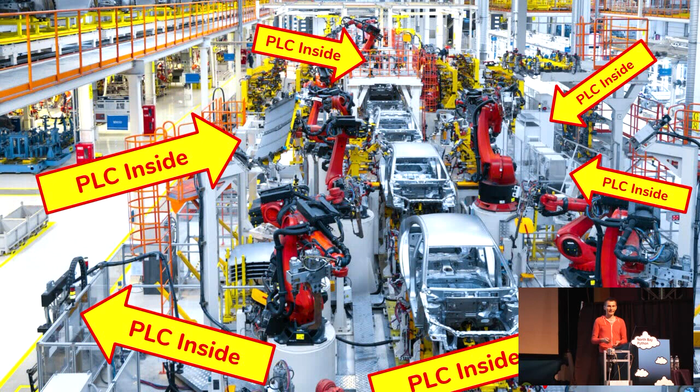Because if you walk around a factory like this one, you keep an eye out for these metal boxes, the electronics panels, and they have a couple of readouts and buttons and dials and stuff on the outside, and if you open them up, it's quite likely that you'll find a PLC on the inside, controlling a robot, or like in this case, a standalone window tinting machine.

Of course, most of us don't have access to car factories, so you can also find them everywhere else. Wind turbines, construction cranes, amusement parks, car washes, escalators. In every city, there's PLCs controlling the HVAC and the elevator of most buildings. At this point, I probably have you believe that there's a PLC in every box that you find in the street. That's actually not the case.

This is an example of a control box for a traffic intersection with a signal. Those are really quite simple in terms of the logic that's going on, and there's thousands of them all over the country and the world. You can actually buy fixed electronics off the shelf, and you don't need any programmable logic. There's nothing custom in it. Except, of course, when your intersection is part of a traffic management system that's capturing the whole city, or you have a tram crossing, then your logic becomes custom again. You need programmable, so you might be using a programmable logic controller.

You might have heard that thing where if you're in a big city or in a small town like Petaluma, you're never more than 10 feet away from a rat. I'm gonna add to that urban myth, and I'm gonna say you're also never more than 50 feet away from a PLC.

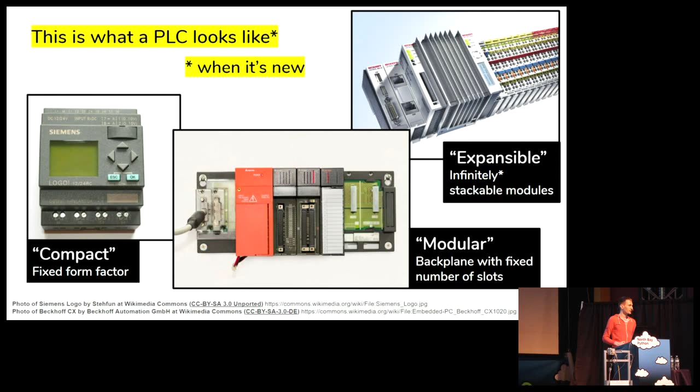I do realize I haven't told you what a PLC actually does. The wires are the first hint. So we talked about how PLCs are programmable, so they definitely live in the world of software with bits and bytes. But the wires connect them to field devices, and those aren't like Ethernet wires or anything. These are just electrical wires. So the other side of the world that the PLCs have the other foot in is the physical world of atoms and electrons. And the PLC is one of the devices that lives right at that interface.

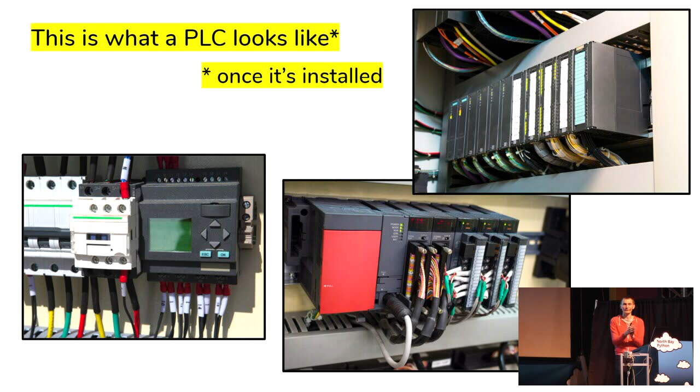I mentioned field devices. What's that? It's a fancy word for sensors and actuators. And you all know a sensor is the kind of device that takes a physically observable phenomenon from the real world, turns it into an electrical signal, and maybe we can turn it into a variable later on. And an actuator is sort of the reverse. We might start with a variable, we turn it into an electrical signal, and the actuator has an effect on the physical world. I made this slide, took me forever.

The only take home here is there are lots of different electrical signals out there. In fact, that's where this whole modular business I talked about earlier comes from. You can't just wire any wire up to any port on the PLC. You need to buy the right hardware that supports the type of signal you're working with. We're not going to do an intro to signals here. That was actually a semester-long class in my undergrad.

What I want you to remember is that there are digital signals that are either on or off, and they might turn into a Boolean variable later on, and analog signals that need to be sampled more precisely, and they might become a number in our code later on. And then we have inputs from the sensors and outputs to the actuators, which leads to cool abbreviations like DI for digital input, AI for analog input, DQ for digital output. Yes, there's a Q there, and that's just a weird standard in automation. I assume they use a letter Q because the letter O looks too much like the number 0.

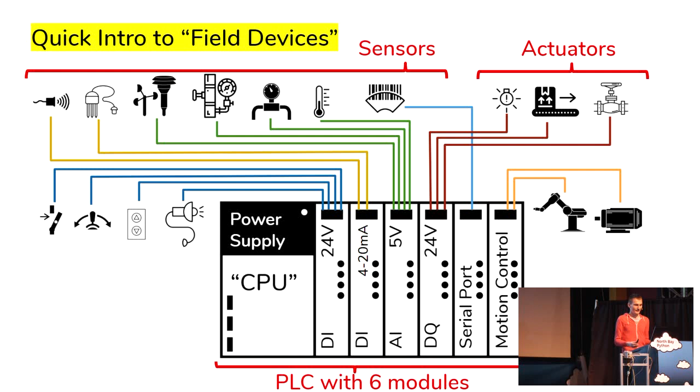So we've purchased it, we wired it up. What does it do? Like every computing device, PLCs go through the IPO cycle. We actually heard about that yesterday. Step 1, input, in the case of a PLC, is where it samples the electrical signals that come out from the field devices. It turns it into a variable. It stores it in a place in memory called process image in. Step 2, program or process. We execute some application program.

Now, most programs that we write take input variables and compute output variables from them. The outputs get stored to somewhere else in memory. And then step 3, output for the PLC. That means take those output variables and write them back to the electrical wires as electrical signals to the field, to the actuators to do something. This gets executed over and over and over again at a sort of fixed cycle rate. And the interesting part really is step 2, because that's where we can have an effect on what the PLC is doing. And also that's where the name comes from, because that's where this programmable logic lives.

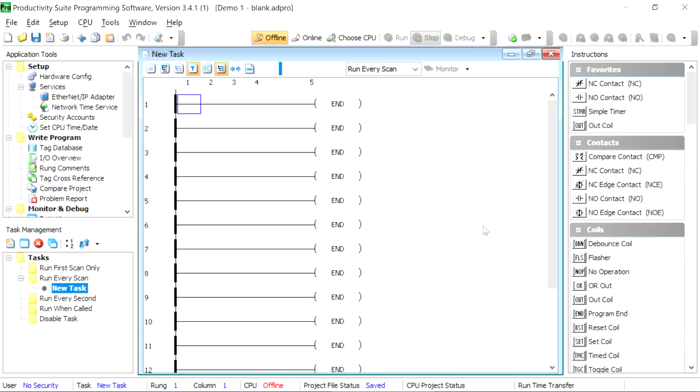All right. Just to recap, we've established PLCs are the device at the interface of the world of software and the world of hardware, the physical world. They're wired up to field devices with electrical signals, and we can program them. So why don't I fire up my favorite text editor and start programming the PLC? Just kidding. PLCs are not programmed with text, and you also don't use your favorite software.

You use the one software that the vendor of the PLC gave you to program their brand of PLC. So I actually selected the PLC I brought today specifically because the programming software is visually uncluttered enough that I dare to show it on a presentation screen. You should check out what the other programs are. I'm also going to use this zooming in feature every now and then.

So this is really the programming, like the editor window here. You see my cursor dancing around? On the left side, there's this vertical line. Imagine that's electrified. There's a voltage applied to it. And the electrons are trying to travel across these horizontal lines here. Now, we have the power to change their behavior by putting circuit elements like this normally open contact, which I tie to a variable called di1. Now you know why I was talking about signal types earlier.

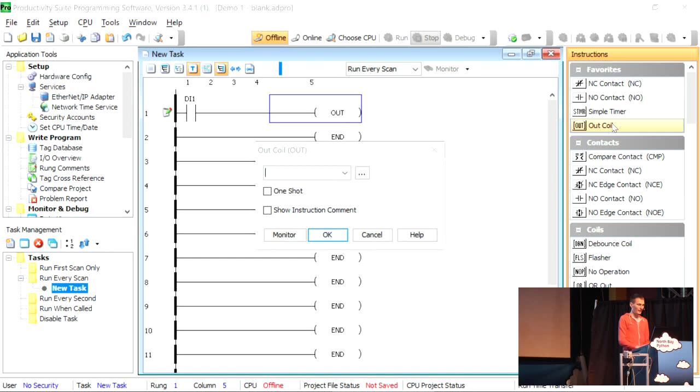Now, if di1 becomes true, current can travel here where my cursor is. If di1 is false, it cannot get there. So we use that to put an output coil that we wire up to a variable called dq1. And basically, we've just built an if statement in this language. If di1 is true, dq1 will also be true.

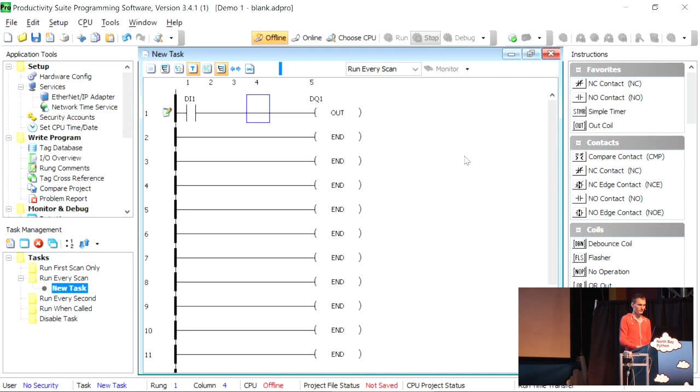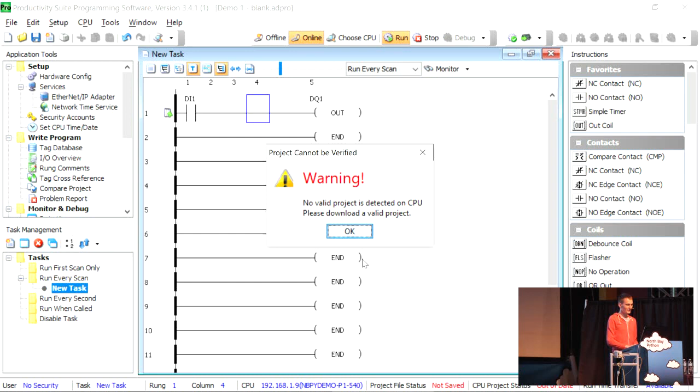Now I go connect to my PLC, which I should have totally done before the presentation. Oh, moment of truth. There we go. And the goal is to send that program over to the PLC. What? That's good news. It's fine. That's all good. We sent the program over. I've got an Ethernet cable here, which connects my laptop to the PLC. So the program, hopefully, is traveling over there right now. Is that thing blinking?

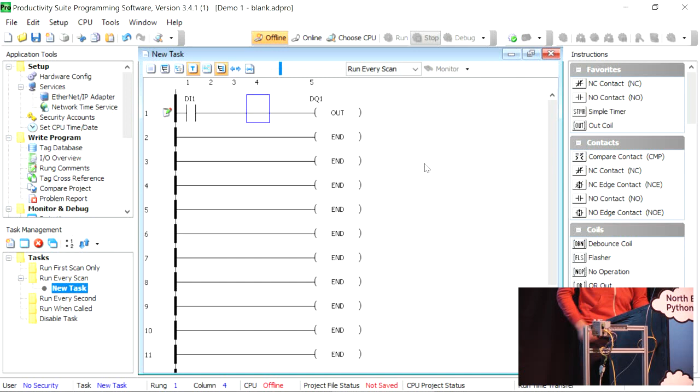Nope. Yeah, that's not how the demo is supposed to go. I am going to power cycle this really quick.

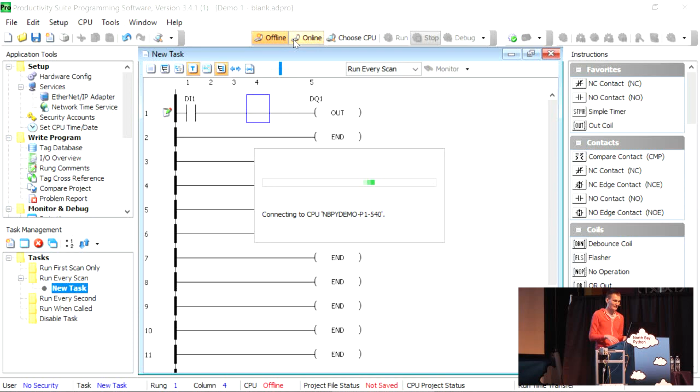So let's assume we sent that program over here and everything is good, right? We need to test it somehow. So how are we going to test this? Well, we need field devices. Normally at home, I would use like a little LED or something like that that's on my bench. I'm kind of gambling here because now comes sort of the big reveal, and oh yeah, it's working. So because you wouldn't be able to see the LED, I picked something up on the way here that will make this a lot more visible.

Wow, this is good. It's not working. And then you test it a million times. I also brought us an input, so I'm going to wire this up. And I mean, that works, but that only works because I put the program on there before I started.

So I'm going to take what? All right, let's try that one more time. There we go. This is the one we want to connect to. And now I want to use my program. I'm going to resume the talk by pretending that I actually need to send a program over the Ethernet cable, which I already mentioned. And now we can go and test it.

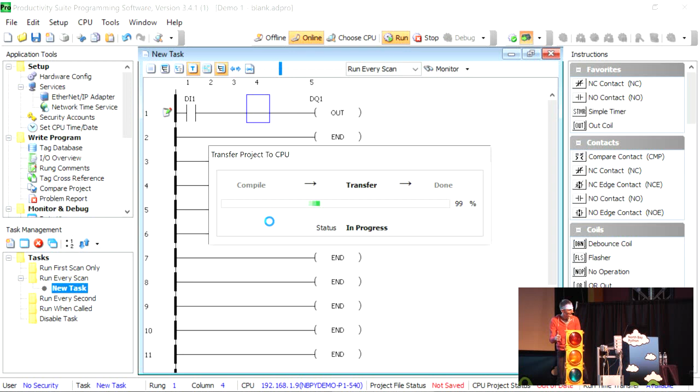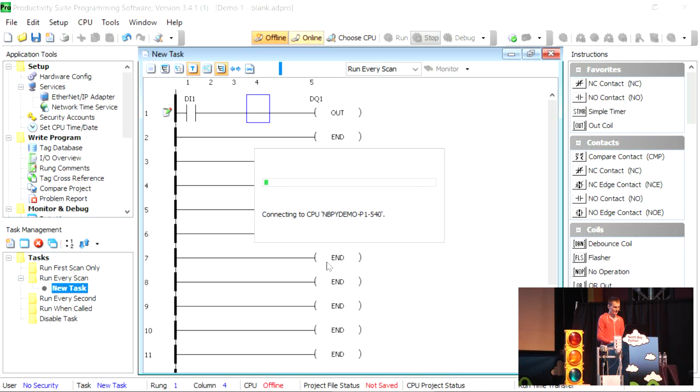99%? All right, this isn't going very well. So I'm wondering if I should go to my backup slides. Maybe this is the point in time. One more check of the networking here and plug this in. All right, well, I don't know what's happening on this stage here. I tested this a million times. Obviously, the Ethernet cable doesn't want to do it.

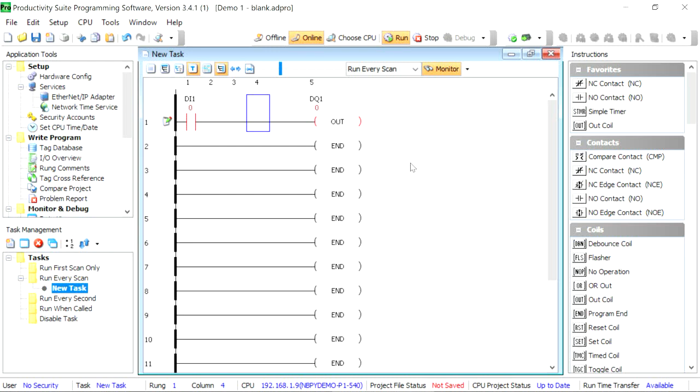All right, so we programmed this. I press the button, the light comes on. Pretty simple. We can actually go into this monitor mode, network gods permitting, and you can actually see the variables change on the screen, which is kind of a cool feature.

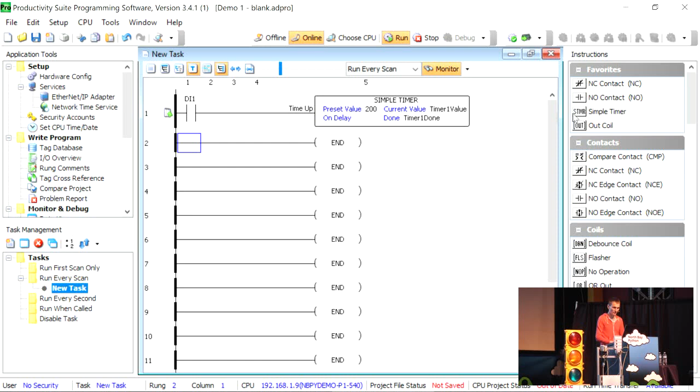One of the big problems in electronics is debouncing. When you change an input really quick, you get a bit of an undesirable effect here. So one thing we're going to do is we replace our output with a timer, and we say count up to 2 seconds, which is 200 in this weird language. We tie up some variables to that timer, and then we add a second rung, another normally open contact, where we say if timer 1 is done, then we want to switch our output coil on again, and remember that variable is called DQ1. Now we program that over again.

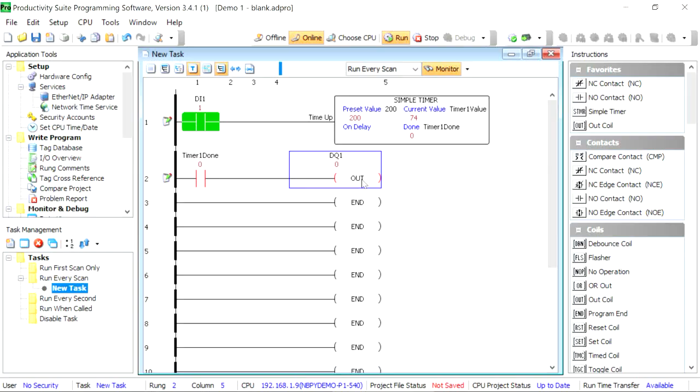And then the behavior, of course, is that when I press the button, nothing really happens, but you can see the counter counting up. And when it reaches 200, the light comes on. I let go, it resets to 0. Press the button again, it starts counting from 0 again, goes to 2 seconds, the light comes on.

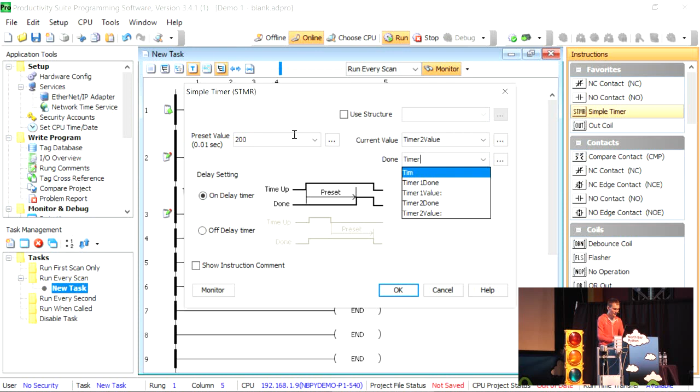All right, after our quick technical snafu, you guys are becoming experts at this PLC programming business. I'm going to show you one more little trick here. I add another row on top here. I add another timer. I'm also going to have that count to 2 seconds. I'm going to call it timer 2 value, and then I say timer 2 done is the variable that tells me if it's done.

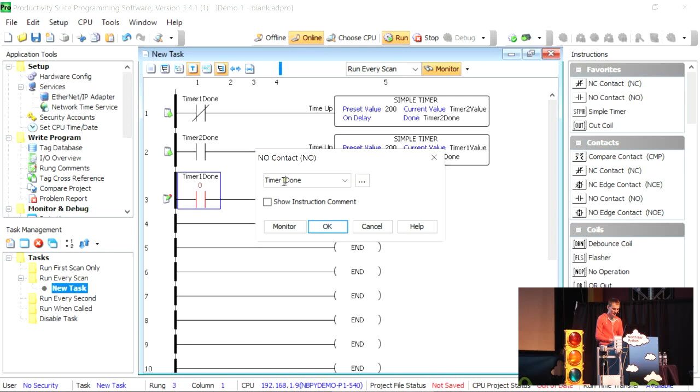I'm going to add a rung here where I use a normally closed contact and say if timer 1 is not done, that's the strike through, it's a normally closed contact as opposed to the normally open ones. So if timer 1 is not done, then timer 2 should start counting. If timer 2 is done, I want timer 1 to start counting, and then if timer 2 is done, I also want the light to come on. And because you guys are all wizards, you can use the time while it's sending the program over to figure out what this might end up doing.

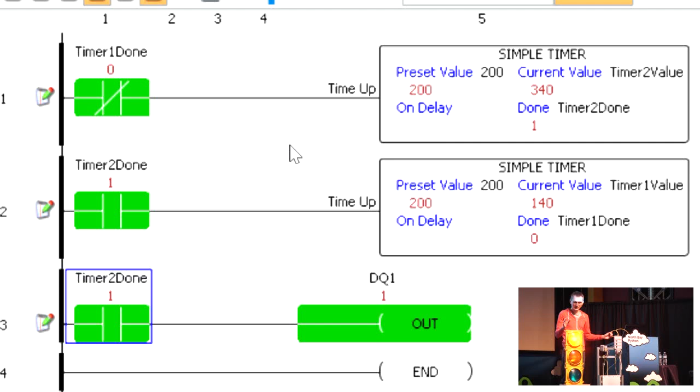Oh yeah, we got the hello world of any electronics project, a blinking light. One thing just to be clear is the logic is being executed on this PLC. The network cable is purely for sending the program over and doing this monitoring business that's going on the screen. In fact, and now I'm tempting the demo gods, I can unplug this Ethernet cable. The light will continue blinking. And of course, I lost my network connection, so you no longer see updates on the screen. Then I plug it back in, and everything will magically go back to normal, I'm sure.

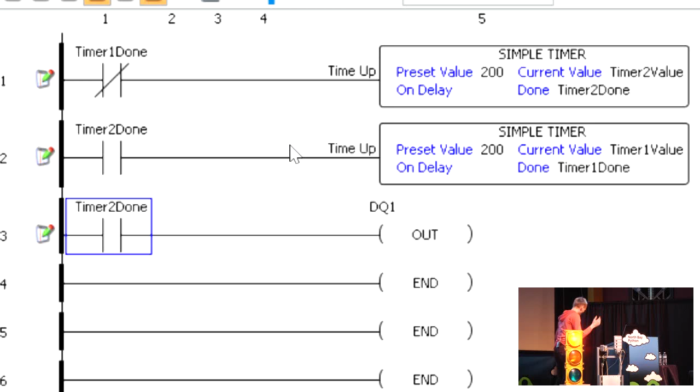All right, so what did we... Actually, I'm going to stop this because that's distracting. What did we just see? Well, this was the screen. The language I made you an expert in is called ladder logic because it looks like a ladder. There are the two rails on either side, which are the vertical lines. They're connected by the rungs of the ladder, which are the horizontal lines. The neutral rail is not really shown in the software, so I put a little gray line here. The hot rail, it's called hot because you imagine it's under voltage. You touch it, it zaps you, it feels hot. Also, the conditionals we put on there, we call them contacts, and the output variables, we call them coils.

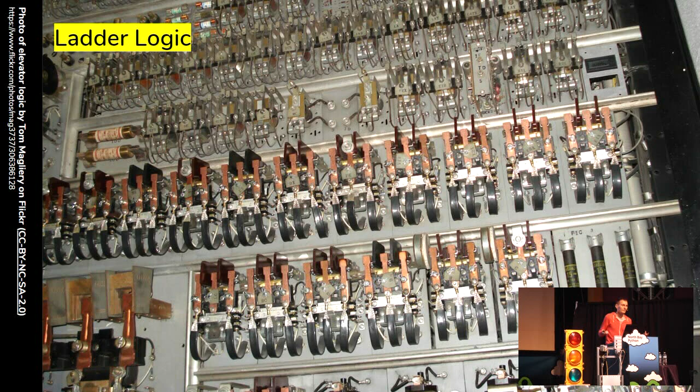Why? This is why. Before the time of PLCs, the way you would program your control system is you buy a big bag of relays, lots and lots of wire, and then depending on how you connect these relays with wires, the physical layout of your wires is actually the control program. Now, if you've ever worked with a relay, the two terminals that you wire up your input voltage, they're called contacts. When you switch the voltage on, you energize a coil, which electromagnetically switches a switch, which is the output variable. So that's where the terminology for ladder logic comes from.

I know some people are playing programming language bingo. Listen to this. Ladder logic obviously is a very old language. It's been around for 50 years and inspired by terminology that's much older. So the likes of Pascal, COBOL, Forth, Lisp, all of those, they can step to the side. Ladder logic is the true elder statesman of the programming language.

There are different views on the fact that it's still in very active use in industry. There's what I call the Hacker News view, where you think everything old needs to be disrupted, and you write things like, oh, these people are stuck in the technological dark ages. They are programming in ladder logic. And then there's the other view, where you take this anthropological interest and say, that thing's been around for 50 years. Why? It must have something going for it. And that something is that ladder logic still is truly the common denominator across programming for all brands of PLCs. And it is part of the curriculum for automation engineers and technicians.

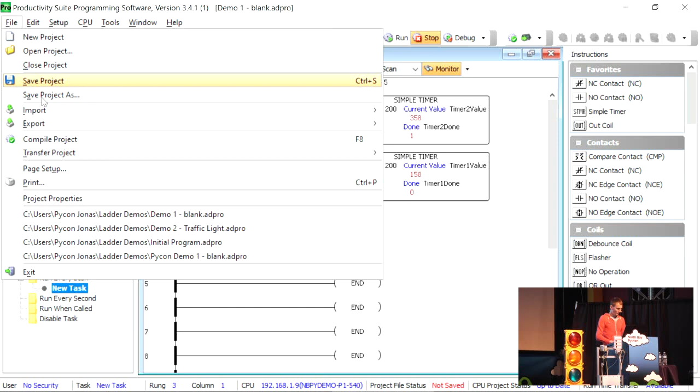We blew right past halftime with our little technical trouble here, but we still haven't seen any Python. So let's change that. For that, I go back over here, and I quickly open up a different program that I prepared. And what we're going to do is that we actually turn our traffic signal into a real traffic signal now. And obviously, there's a part missing that I also brought.

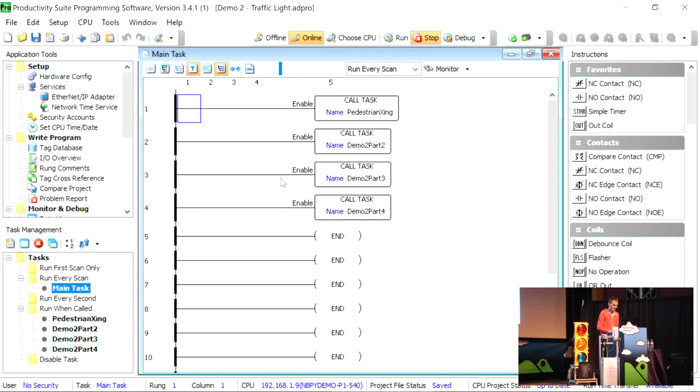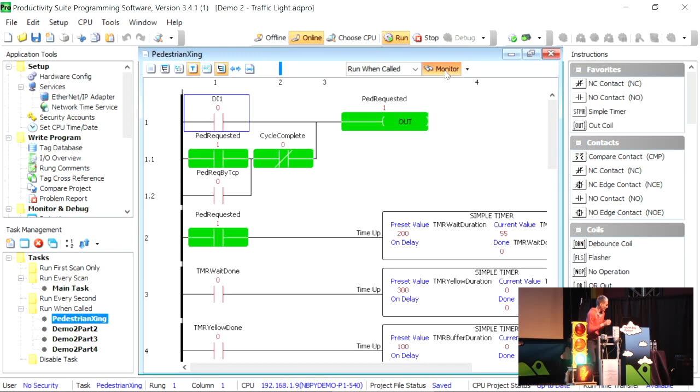All right, is the green light? Is the light on? Oh, because we're not running. There we go. So what this program does, let's see if we can monitor this again. If I press the button, you can kind of scroll down here, and you see that there's a number of timers that fire sequentially. And at the bottom, there's a bunch of logic that just decides which lights are on or flashing or whatever, what have you.

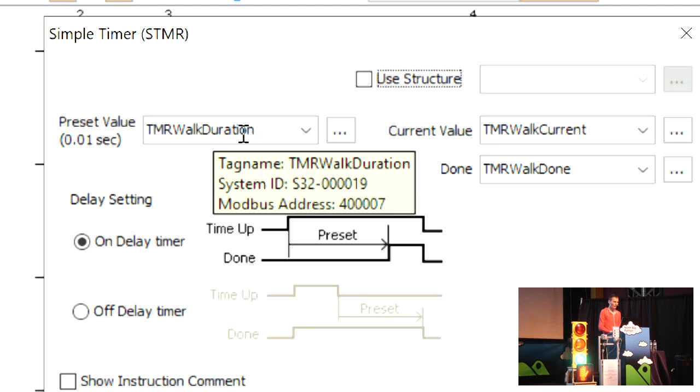So if you go back here, pick any one of those timers, you will notice that the value that we used earlier to define the length of the timer, like 200 for 2 seconds, I now put a variable here, or in PLC parlance, it's a tag. Now, variable names are a bit of a luxury in PLC programming. Back in the olden days, they had to use register addresses and stuff.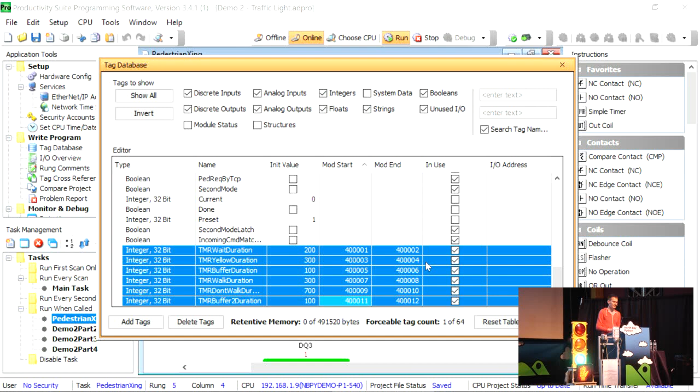So what's going on here is that we're looking at a protocol called Modbus, because shortly after PLCs were invented in the 60s, people realized it would sure be nice if they could talk to each other. So they came up with protocols where one PLC gives another PLC access to its variables. So PLC 1 can actually access variables in PLC 2 and change them, and possibly vice versa. So that's what Modbus and a whole family of other protocols that cropped up over the years do, and they are designed for having multiple PLCs talk with each other.

Now, we live in the modern times, so we can make our computers pretend to be PLCs by installing packages like PyModbus, opening our REPL. I'm now trying to speed up with a whole bunch of autocomplete to open a client that establishes a connection to our PLC using the Modbus protocol. This is the IP address that my PLC lives at.

And we can do things like reading those registers that we were looking at, and we see those numbers here. Those are actually the timings of the traffic light. 2 seconds before the yellow shows up, 3 seconds of yellow, 1 second before the pedestrians get a walk signal, and so on. So the first thing I do with that, I realize I have write access, and I'm going to fix the traffic light. That's a joke that comes later, don't laugh about it yet.

So I want to change the traffic light so that pedestrians don't have to unnecessarily wait. I'm going to tell it to only wait 1/10 of a second after pressing the button for the yellow light to come on and stop the traffic. So there's a whole bunch of zeros kicking around here, by the way. I don't have time to go into those. You just have to believe me, they are necessary.

We're sending that over. We're going out to the street to test. Press the button, almost instant yellow. This works. People in our town get word that we are the ones who know how to change traffic light timings. The treasurer comes to our office and says, you know, we installed that red light camera that never catches anyone. Can we make the yellow shorter?

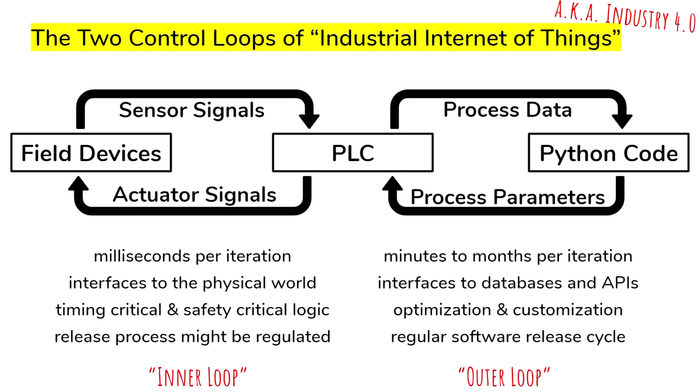The buzzwords to look for that capture all of this, one of them is Industrial Internet of Things, IIoT. In Europe, they call it Industry 4.0, but they effectively mean the same thing. Now, the way I would recommend thinking about this is that there are 2 control loops. The first control loop is the one that's running on the PLC. Milliseconds per iteration. It interfaces with the physical world. It does all the timing critical and safety critical things. It basically implements the laws of nature or the laws of traffic. Two crossing streams of traffic can't have a green at the same time. That's the kind of stuff that happens in there.

Then the second loop is the one that can influence the behavior of the first one, taking into account stuff like, what's the weather today? What's the traffic like somewhere else in town? Maybe some insight gleaned from machine learning applied to process data that we extracted from the first control loop previously. Those things might run every minute or every month. You might not know how long they take, definitely not real time. You might be querying databases, APIs. It might fail, and that's fine, because the first control loop is still running this process safely. You're just there to optimize and customize it.

Many software engineers who learn about automation and control engineering for the first time think the objective is to replace this existing old stuff, the ladder logic. And I would recommend not taking that view. The way to go about this is to learn how to interface with what's already there, wrapping a layer of software around it, and generating value that way.

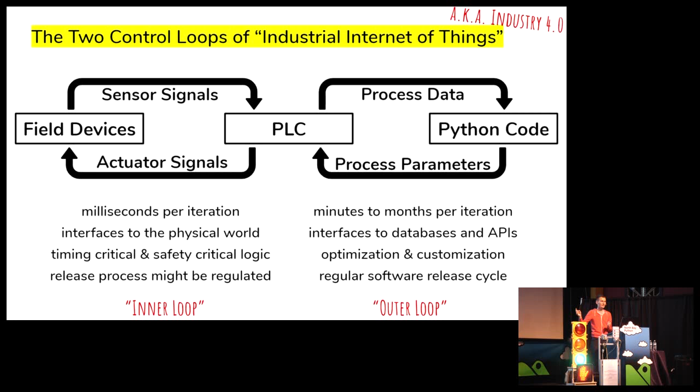Now, I've given you one tool so far for doing that, PyModbus, to emulate the Modbus protocol. I also spent a little bit of time, maybe a little more than that, going through all of PyPI and looking for all the packages that implement any protocol that you can use to talk to industrial automation equipment. And on the next 4 slides, which I'll go through very fast, I basically give you tables with those packages in increasing order of difficulty.

That's cool. And you get to subscribe to variable changes instead of having to poll. So you get little conveniences like that by using the vendor protocols.

I also want to call out OPC UA. I think of all the protocols I'm going over here, OPC UA is the one that everyone here will recognize as a clean API. It's relatively modern. It uses XML. It's discoverable, so you can connect to a PLC without knowing the variable names and addresses ahead of time. And the other reason I bring it up is that there is a project called FreeOPC UA, which

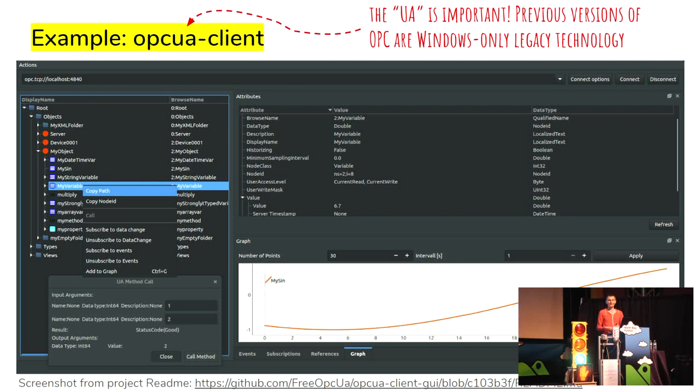has one Python package that implements the protocol, a second Python package that implements a client and server for the protocol, a third Python package that implements an async I/O client and server for the protocol, and the fourth one, which is on screen here, an awesome GUI app that you can actually use to connect to a PLC and explore what's on there and communicate with it, all written in Python. And they're great. It's an actively maintained project, very open to new contributors. So if you want to tinker in this field, this might be a good starting point.

The remaining 2 difficulty levels, the list gets a little bit sparse. This is when we're doing networking without IP addresses. So we use an Ethernet cable, but to talk to somebody else, they don't have an IP address. That's a thing that actually is very uncommon in most software developers' lives these days, but very common in industrial automation, because TCP/IP is by design not real time. You don't know how long it's going to take. It's just a promise that it will eventually maybe kind of sort of happen. That obviously doesn't cut it when you have safety critical machinery. So a lot of other Ethernet-based protocols exist in industrial automation, and there are sometimes ways to interface with them and sometimes not, depending on how fast you need to be to do it.

Finally, 4th level is all bets are off, custom cables, weird serial things. If you find yourself in the land of serial cables and CAN bus, you'll have to start by buying some converter hardware and all these kind of things, and there might be some libraries available or not. I would recommend steering clear of that when you can.

This could be my last slide, but as soon as I walk down those stairs, someone's going to come up and be like, what about MicroPython? What about my Raspberry Pi? That can do all the things that your PLC can do. There's like a 10-slide long answer to that. I'll give you the short one. First, your Raspberry Pi will likely not survive most of the environments that PLCs are deployed to, just from environmental conditions. Second, if you use Python on a Raspberry Pi to implement a safety-critical control system, you might also not survive it. So don't do that.